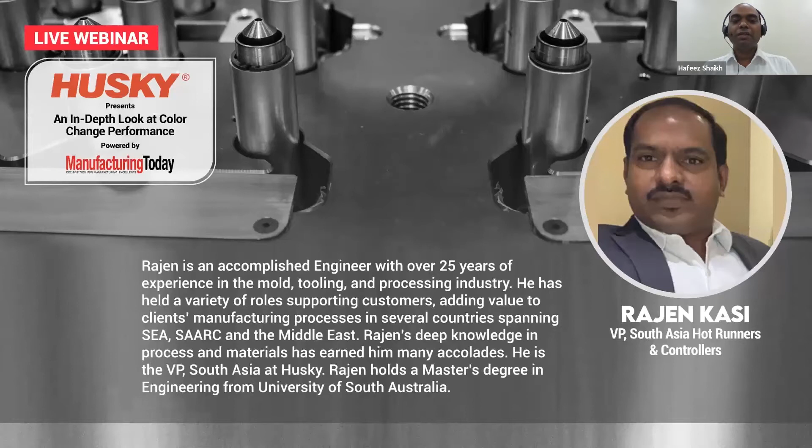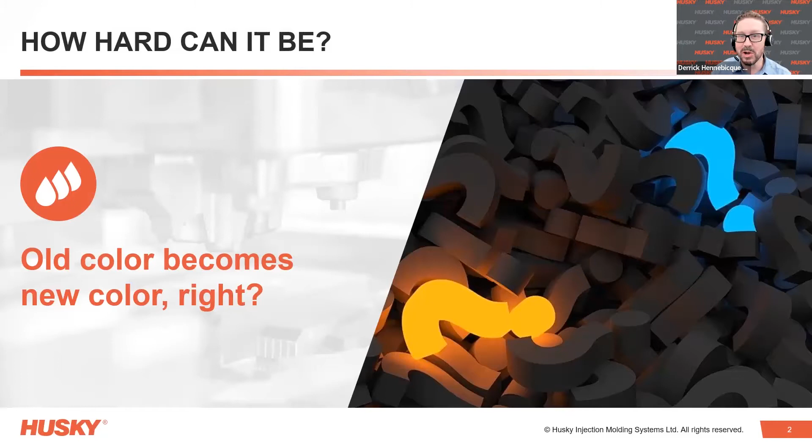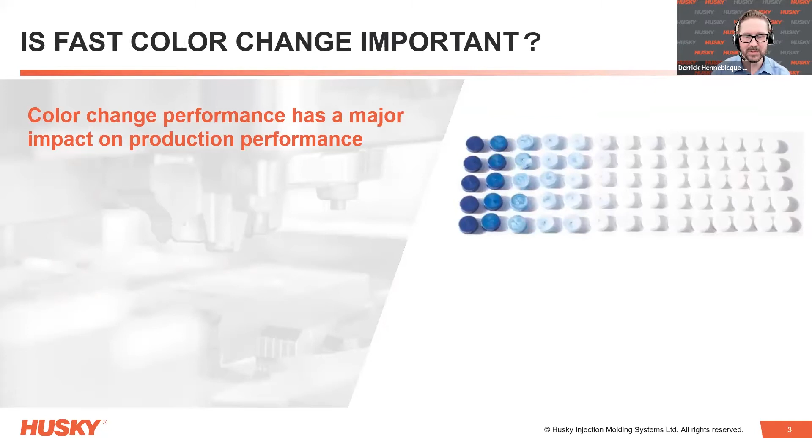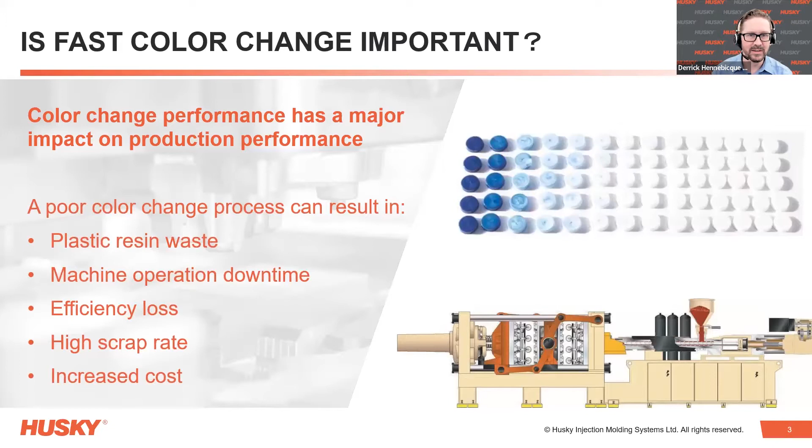From the outside, color change may seem simple and have little relevance to production or manufacturing. We just replace the old color with the new color and keep making product. How hard can it be? Of course, it's not that simple. Material must be cycled through the melt delivery system, replacing material of one color with material of another color. While it would be great to replace the color in a single shot, this is highly unlikely. Downtime and scrapped material are a fact of life when it comes to changing color, and it is a necessity for meeting the quality requirements of a specific customer or brand. A poor color change process can result in extra waste material, a high amount of downtime, and increased scrap. These can accumulate to higher production costs.

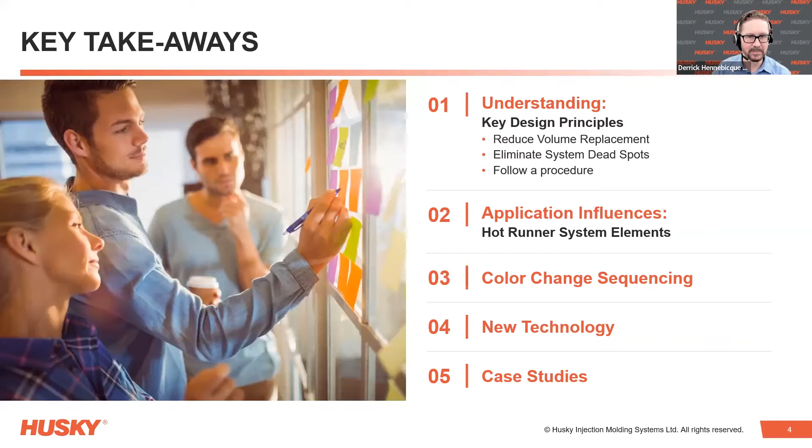Today, we'd like you to take away 5 things. First, the design principles behind hot runners and color change. Second, how those principles relate to hot runner design elements. Third, the benefits of color change sequencing. Fourth, we will discuss new technologies outside the hot runner and how they apply. And finally, we will talk about a couple of case studies. The first principle of hot runner color change is about minimizing volume.

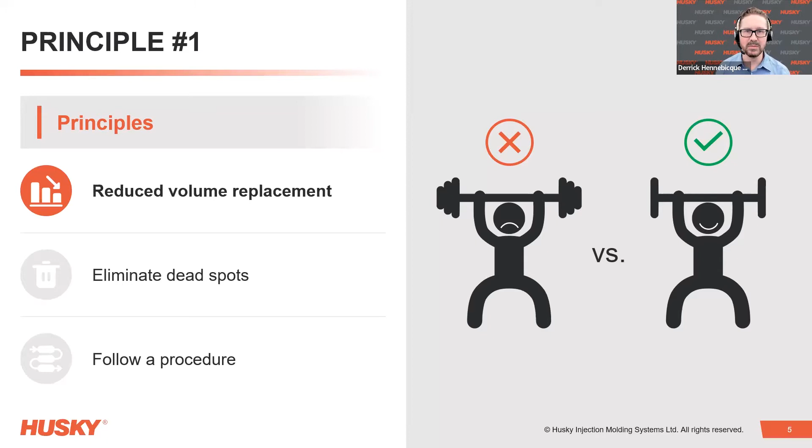Like the cartoon shown here, small things are easier to move than big things. When it comes to hot runner color change, the thing to move is the previous color's volume of molten plastic inside the melt channels. If this volume is small, it is much easier to displace than a larger volume.

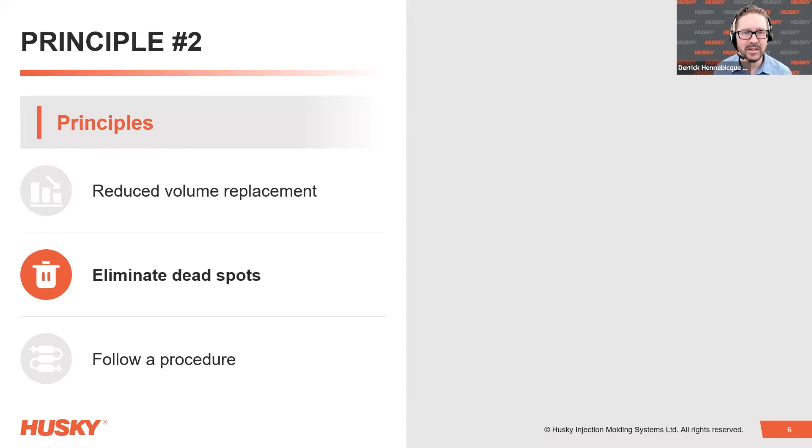The next principle is eliminating or minimizing dead spots, also known as no-flow areas or stagnation areas. A visual way to consider this is with the surface of a road. If the road is smooth, rain quickly and easily runs off the surface. But if the road is rough and full of bumps and holes, rain can pool and collect, causing slow and long-term damages and deterioration. The hot runner is the road the melt follows from the machine barrel to the cavity.

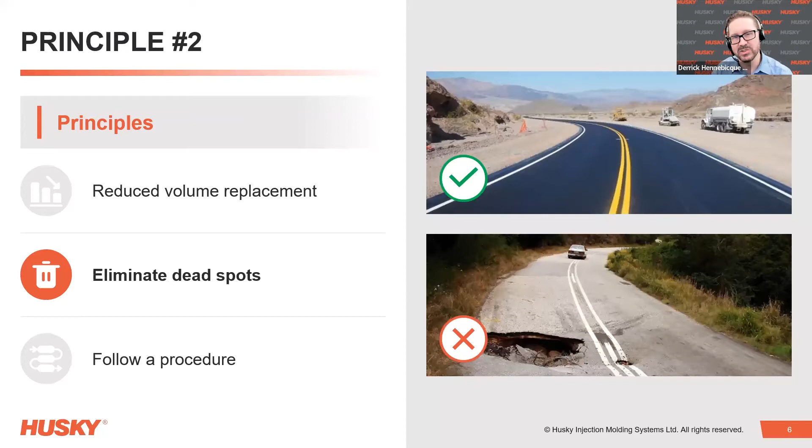The bumps and potholes in the road represent these no-flow or stagnation areas in the melt path. Old color may snag or hide in these no-flow areas where it can eventually stagnate and degrade. Old color in these areas may unexpectedly burp or bleed into the melt stream during production of the new and different color, causing scrap. It may require an increased effort or process changes to scoop out that old color, extending downtime for the changeover. So this isn't just about melt channel quality, it's also about managing the flow of that melt.

So the final principle is to follow a procedure and set expectations. It's important to understand these expectations, and it's known that many variables affect color change, which can affect the ability to meet that expectation. Process settings can help color change tremendously, so it's important to know if they can be changed. Designing a specific color change schedule and procedure can directly manage the ability to meet those expectations.

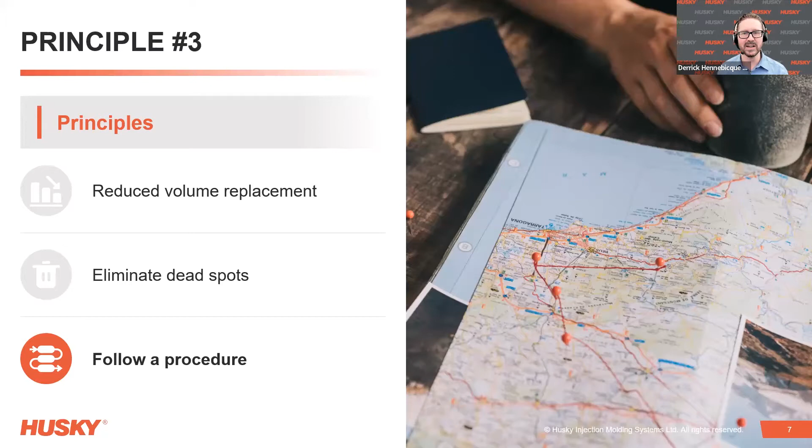For example, we wouldn't expect a 5-minute color change when dumping a bucket of white material into the hopper that's half full of blue pellets, unless we've seen it happen before with that same exact work cell and those conditions.

Now we will talk about how these principles apply and how they influence hot runner applications and designs. Our first influence is the control of gate bubble volume. This is affected primarily by the nozzle size and the gating style. The gate bubble is the volume of plastic surrounding the nozzle tip between the nozzle tip's seal ring and the gate orifice.

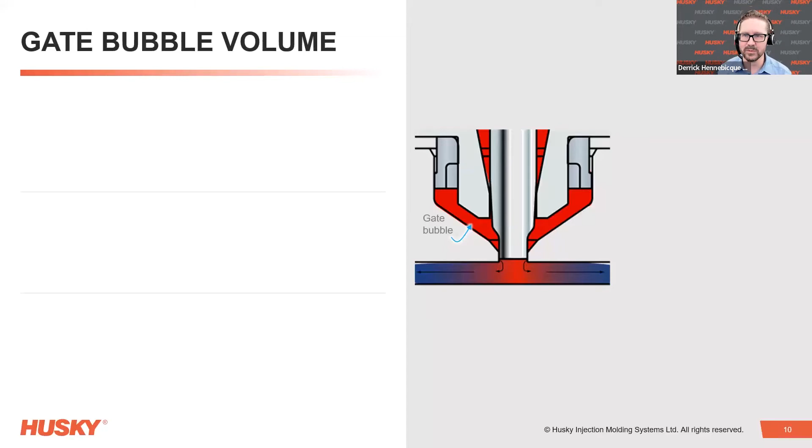While processing, this area is neither completely solid or completely molten. The resin contacting the gate steel is cool and solid, which acts as an insulator, but the resin closer to the heated nozzle tip is hotter and molten, giving the flow path from the nozzle to the cavity. The exact properties of this bubble and its cross-section are heavily dependent on the application and the resin.

The design of the bubble may have a stagnant or backflow area. This aligns with our bumpy road principle, where color in no flow areas can be difficult to replace and can extend color change time. The gate bubble and its effect on color change can be managed with a tip insulator.

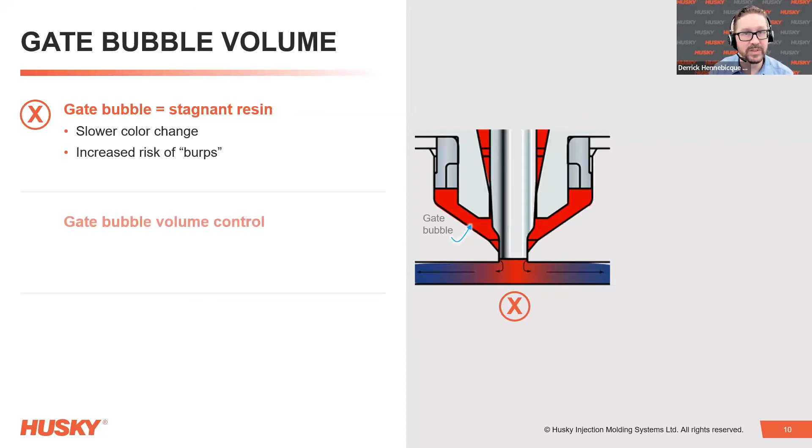This part is made from a relatively soft material that can withstand a relatively high temperature. This applies our reduced volume principle as it replaces and reduces the molten volume in the gate bubble. It also eliminates the stagnant or the backflow area.

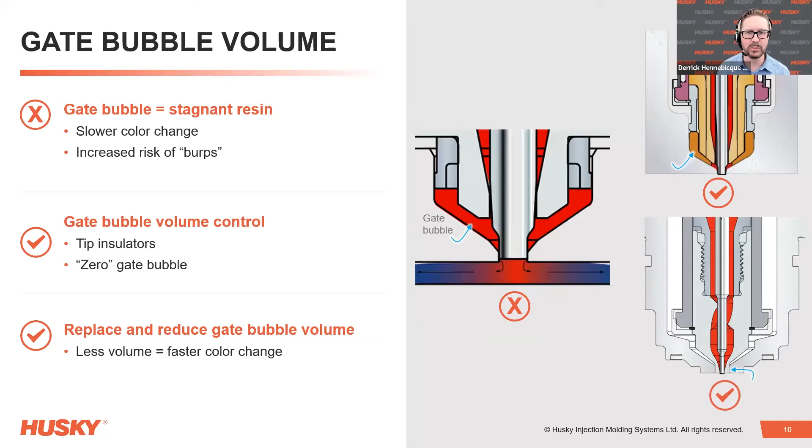A gate bubble is nearly unavoidable, but certain nozzle tip designs discard or zero out the gate bubble by sealing at the cavity interface. This also follows our reduced volume principle by eliminating the gate bubble altogether. With this gating style, no tip insulator is needed because melt flows directly from the nozzle into the cavity.

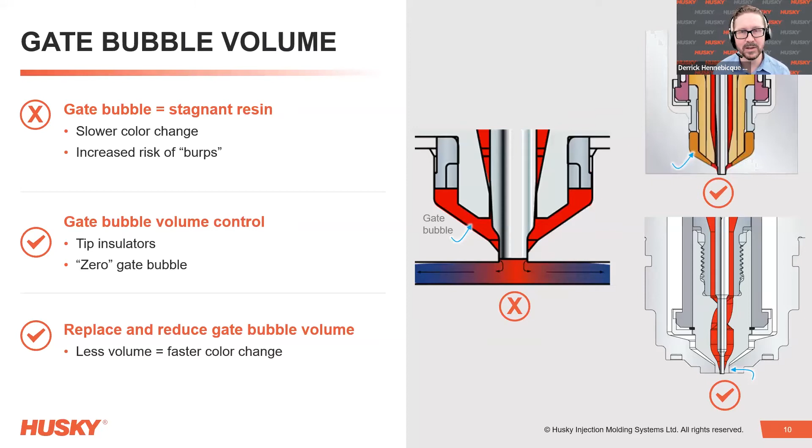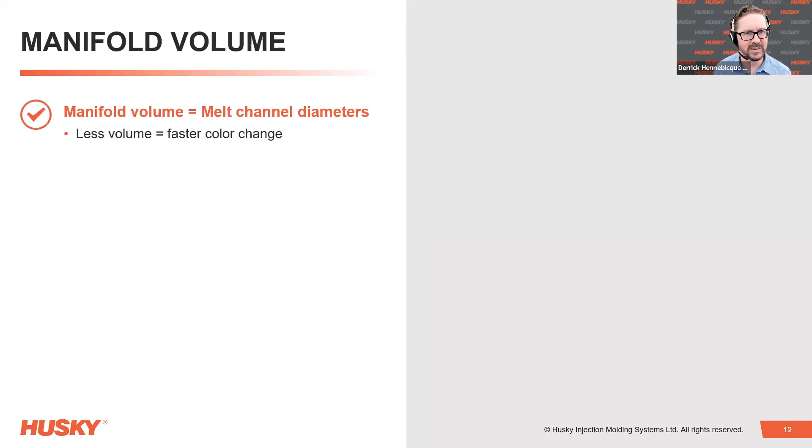Our next influence is manifold design. This applies to any hot runner, regardless of nozzle or gating style. When considering color change and the manifold's design, the key principle is volume control, and the greatest design influence on volume is melt channel diameter.

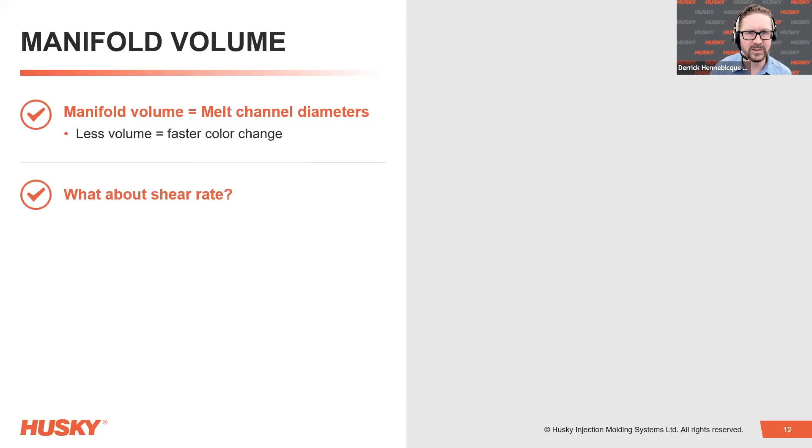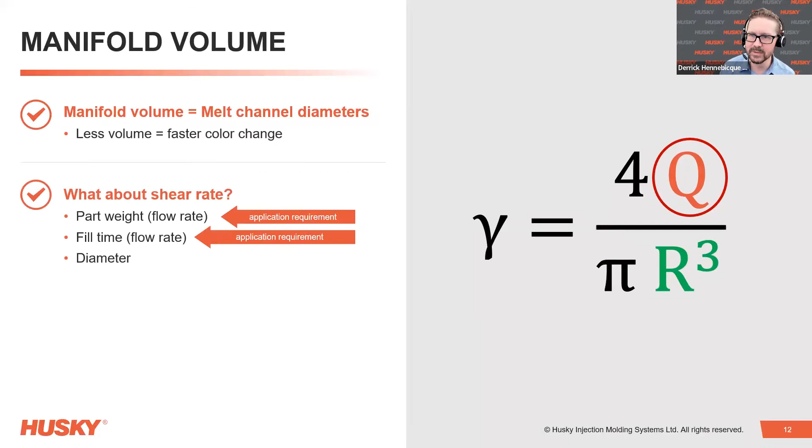Shear rate is sometimes quoted to have the greatest influence on color change, but it's important to remember where shear rate comes from. Its first two influences are part weight and fill time. These are application requirements. Part design dictates weight, while part geometry and resin properties dictate fill time. These are not controlled by the hot runner. But shear rate is also dependent on melt channel diameter, which is directly controlled by hot runner design.

While tip insulators or tip choice can be used to minimize volume at the gate, melt channel diameter in the manifold has a very strong influence when designing for color change applications. Since shear rate is not a true unit of measurement, we can view it as an effective rating for the color change performance in that channel or component.

Finally, a hot runner design must also consider the pressure requirement of the application. So while volume or melt channel diameter should be minimized, it should not be reduced so much that the pressure exceeds the injection pressure limit of the equipment. So having an excellent color change can't help anybody if the cavity cannot be fully filled and packed out.

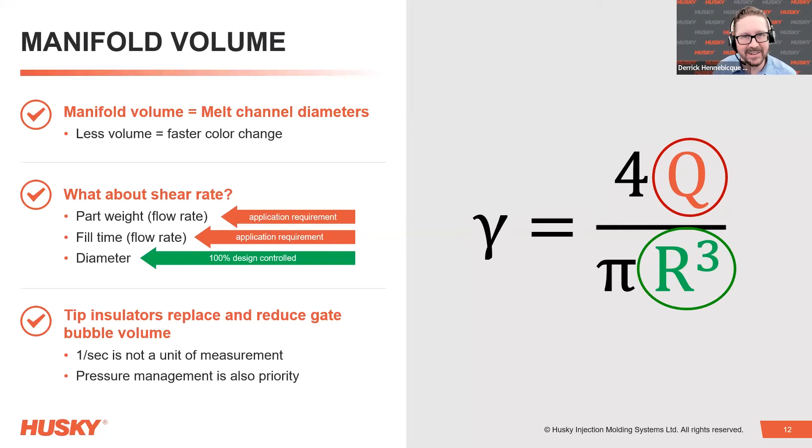Of course, the application or the part itself has an influence on performance. Part weight has an especially strong influence on color change. This is because as part weight decreases, shot volume increases, and as shot volume increases, color change speed decreases.

This is because there are two volume attributes for a hot runner: shot volume and melt volume. Melt volume is specific to the hot runner and is measured in units like cubic centimeters or cubic inches. It is the result of melt channel diameter and mold layout. This is purely geometric and stays the same no matter which press, which part, which mold, or which resin.

Shot volume is application dependent. This is determined by part weight and mold cavitation, which combine to make the shot weight. It is also directly related to the hot runner's melt volume.

For example, let's consider two different molds using the same hot runner. The mold making larger parts has less shot volume, even though the melt volume remains the same for each mold. This is because it's the same hot runner, and the greater shot weight consumes a greater portion of that melt volume. It's important to remember that just like a mold, a hot runner is limited by the laws of physics, thermodynamics, and finance.

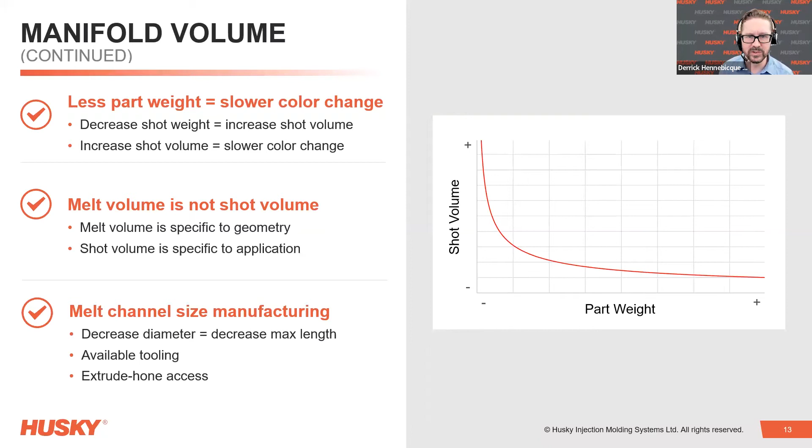The tooling for a small diameter melt channel typically has more limitations than a larger melt channel. This is due to availability of feasible and affordable tooling, which can truly be built and meet the application requirements. This can also limit the access of extrude hone material used to deburr and polish the melt channels. In other words, every design is limited by its ability to be manufactured. It's useless if it cannot actually be built.

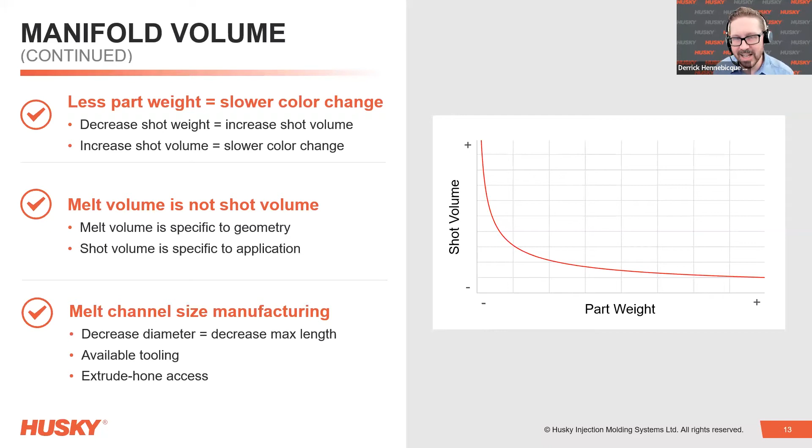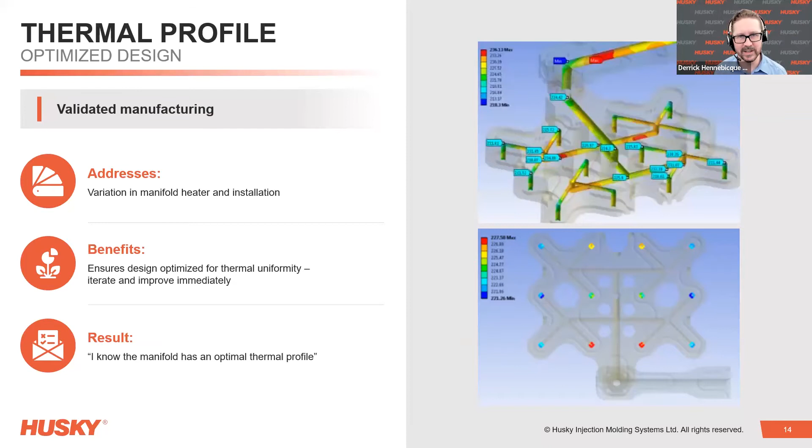Another factor to consider when designing hot runners for color change is the manifold's thermal profile. The thermal profile is optimized by adjusting manifold shape, heater wrap, thermocouple placement, melt channel layout, and load-bearing components. Their combined effect is confirmed and validated by finite element analysis, which ensures minimal thermal variation.

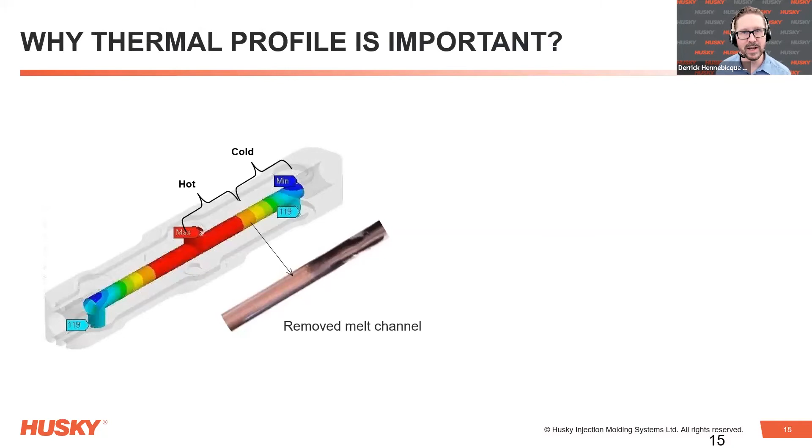In addition to injection pressure, a uniform thermal profile will minimize cold regions along the melt's flow path. In these cold regions, the thickness of the plastic boundary layer at the melt channel wall can increase. This increased thickness can act as a relative dead spot or stagnation area to cause difficulty when changing color.

So to minimize risk, Husky confirms every manifold design's thermal profile.

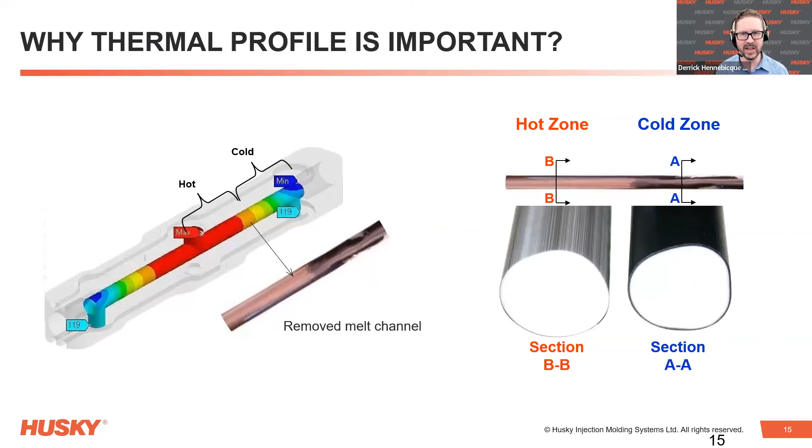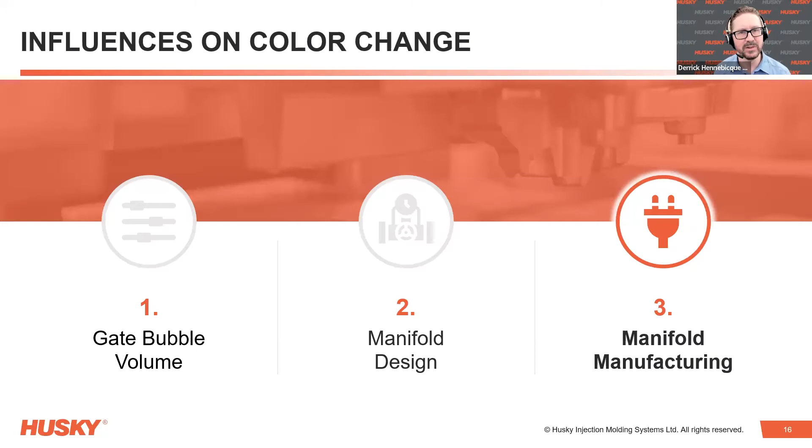While our first two influences on hot runner color change covered application and design, how the melt delivery system is built also has an influence on color change performance. Specifically, this is about minimizing variation.

One way to minimize variation is by automating the heater install. This ensures consistent performance from each heater and each zone. This can be important for high cavitation molds where multiple manifolds with the same design are used. This also ensures consistent expectations if the hot runners are swapped in a fleet of molds, or taking comfort in knowing the hot runner performance will be the same before and after a preventative maintenance.

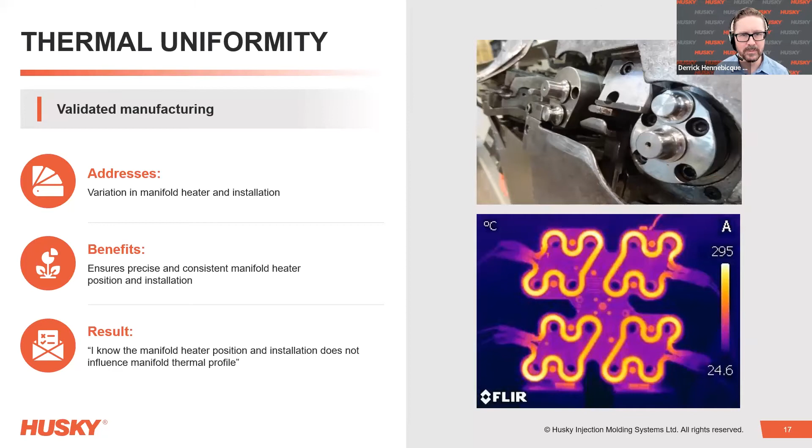In addition to resistance checks and power testing at final assembly, another option is to validate manifold heaters by using thermal imaging. This is periodically used for audits and troubleshooting.

Manufacturing has its greatest effect on the second principle, which is minimizing the dead spots or ensuring a smooth melt flow path. When resin is not flowing, it's stagnant. Not only are these stagnant areas hard to displace, but stagnant resin can degrade over time. If a colorant is sensitive to heat, this can present a challenge to production quality.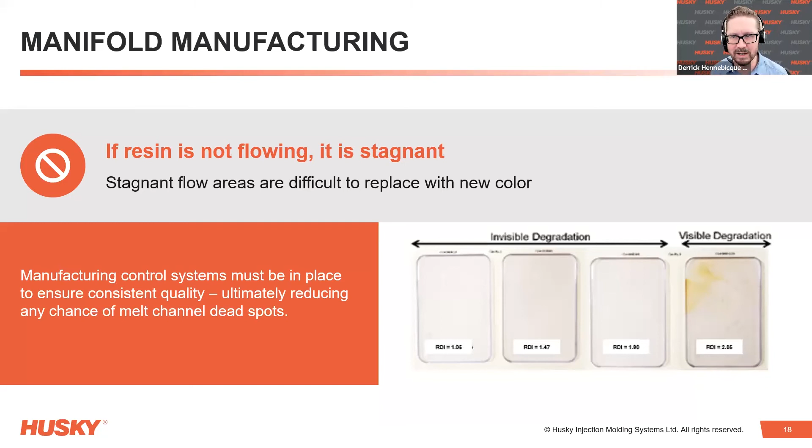One of the ways we validate this is by measuring and comparing the degradation of sample parts from manifolds with various build conditions.

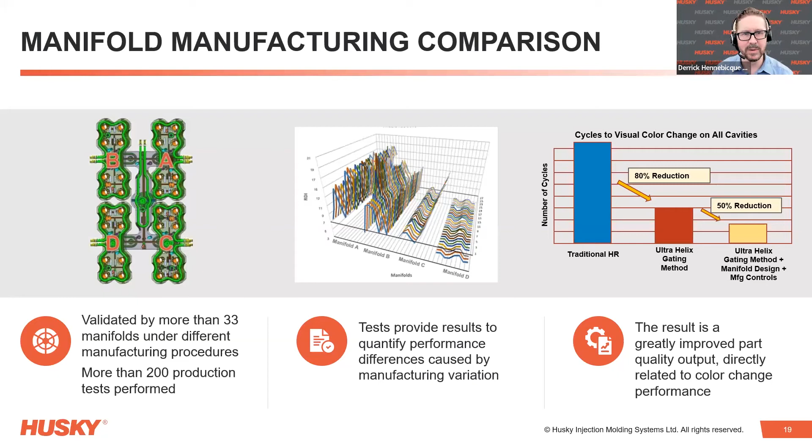We tested these manufacturing influences by building several manifolds with different levels of variation, running color change procedures, and comparing their performance. The results showed that by applying our principles, gating, and minimizing manufacturing variation, we achieved the best color change possible. Among our principles, the third and final is to set expectations and create a procedure.

This is one of the most effective ways to execute color change. It is immediately controlled by the production schedule, the operator, and the equipment on the production floor. The order of colors changed has a substantial impact on resin usage and downtime.

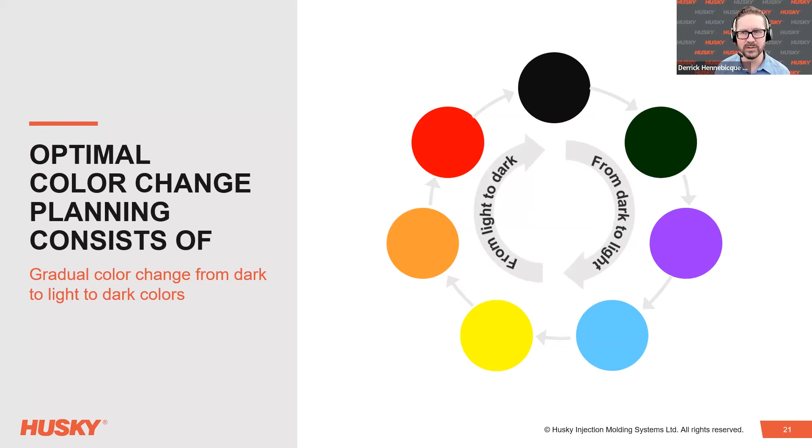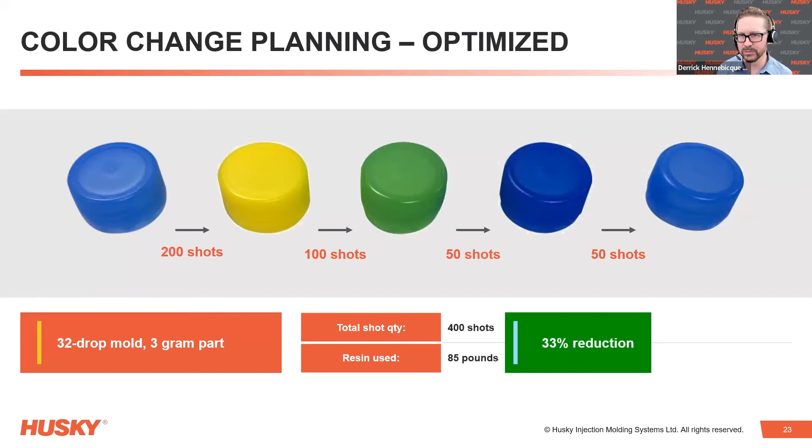But by just changing the run order of these colors to minimize the change time between colors, the changeover was reduced from 600 shots to 400 shots. Wasted material was reduced from 127 pounds to 85 pounds. This was a savings of 33% in both downtime and scrap material.

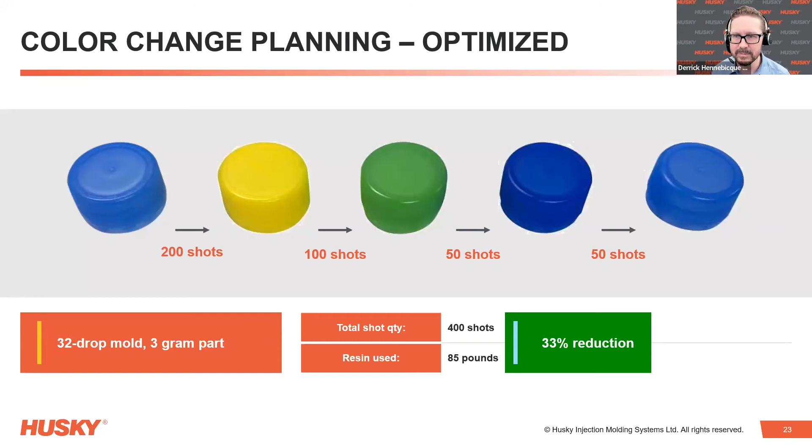By taking this consideration in the production scheduling, this takes advantage of a best practice and is a great example of applying the procedure principle.

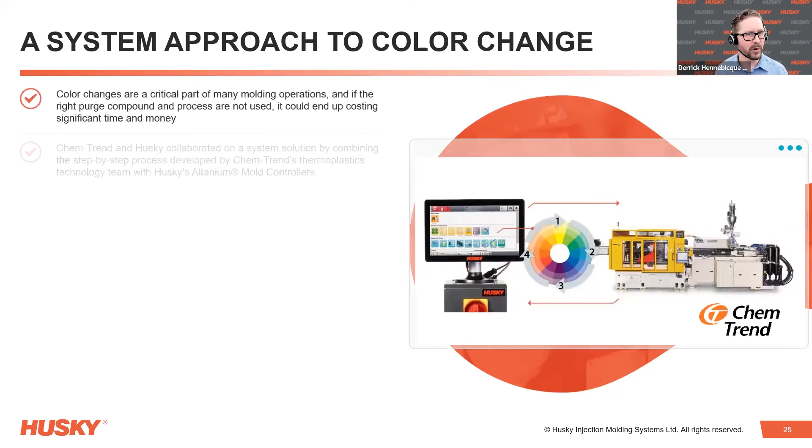On top of hot runner design considerations and scheduling, other technologies can be leveraged to decrease color change time. So far, we've shown changing color does not hinge on a single set point or a single asset. By taking a system-based approach to include the molding machine and the hot runner temperature controller, consistency and efficiency can be improved further by utilizing purging compounds, which are best discussed with an appropriate supplier for your application.

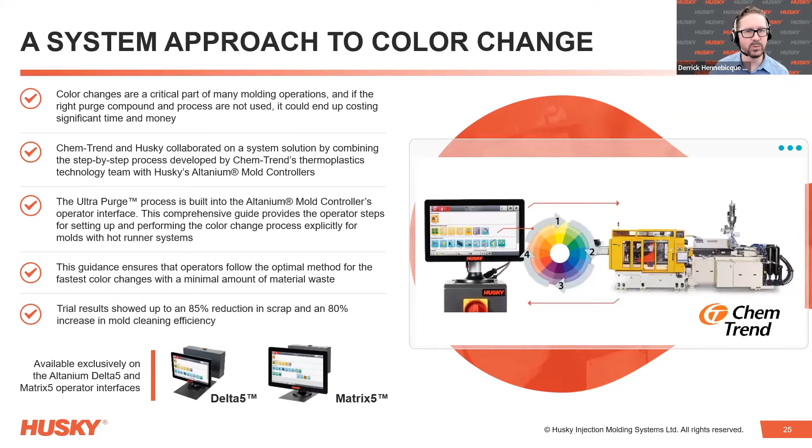Husky worked with one supplier on a system solution to include processes in the temperature controller's operator interface. This gives work instructions that are consistent and immediately available. By having instructions in a centralized location and automating certain steps, this can also reduce scrap and downtime.

Using Husky's ALTANIUM controller and its touchscreen monitor, color change instructions can be integrated into the ALTANIUM software and give precise guidance at the operator's fingertips.

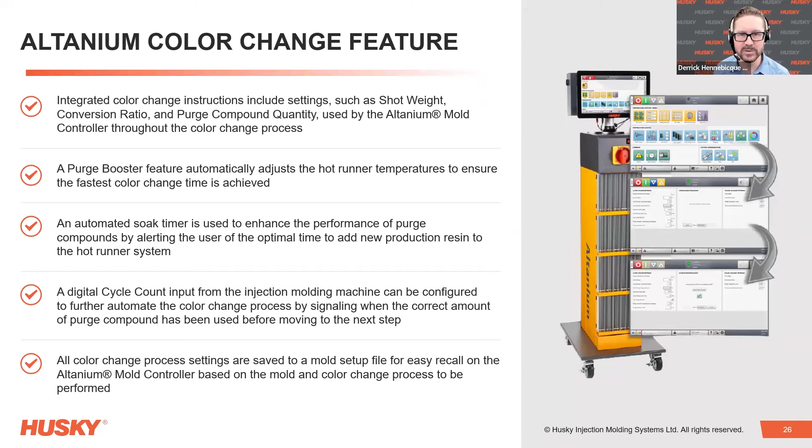Features such as soak timing and automatic temperature adjustment, coupled with cycle count input from the molding machine, can ensure correct steps are followed every time with automated procedures. This delivers consistent and optimized results, no matter the machine or the experience level of the operator.

So now, let's take all those principles and concepts and see their impact on some real-world examples or case studies. In one study, we saw a 32-drop polypropylene closure mold where changing from amber color to natural was reported to need up to 9,000 cycles in 28 hours until an approved part of acceptable color was produced.

This may sound outrageous, but we need to remember that for many large brand owners and OEMs, color represents a specific part of their product brand and is a product differentiator. So what I'm trying to say is that companies can be very picky about color.

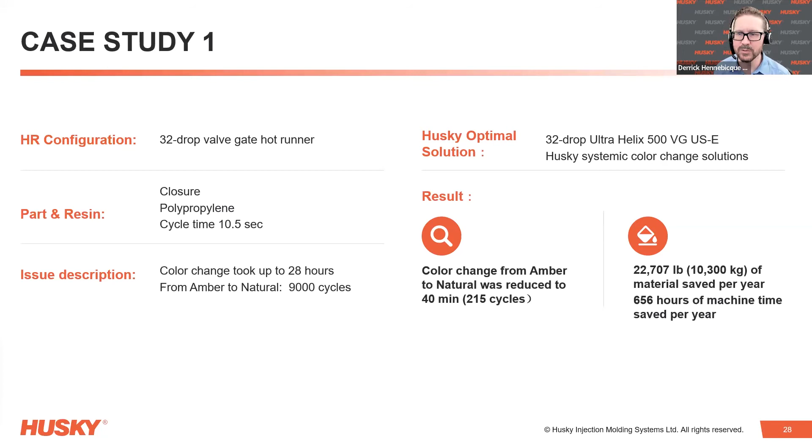Considering this, we implemented adjustments and solutions which reduced that changeover to 215 cycles in 40 minutes. Not only did this save over 22,000 pounds of scrap material, but it saved more than 650 hours of machine time. That's almost the entire month of February.

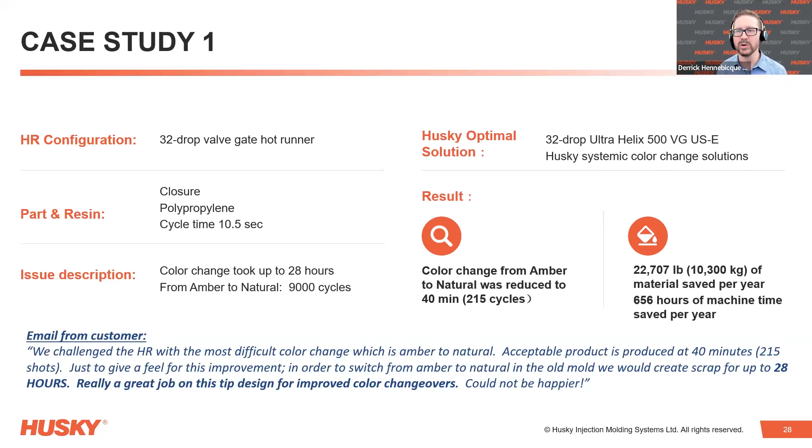This not only represents significant cost to the molder, but was also a significant point of frustration, which can happen regularly in our industry. In another case, we reviewed a 2-shot mold with 8 cavities.

This used 2 different grades of polypropylene. This mold also had a high color change frequency. Its most demanding change was from black to white, which is always one of the most challenging. It required 1,100 cycles to make this change.

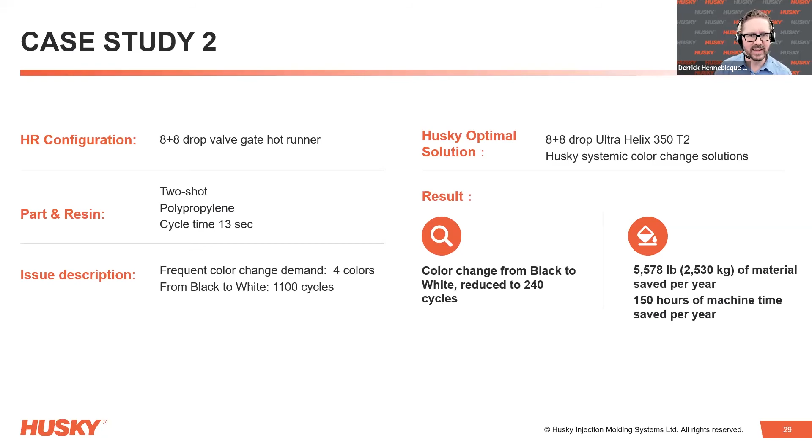With review and solution, this was reduced to nearly a quarter of the original time at 240 cycles. This saved over 5,000 pounds of material and 150 hours of operating time per year. So from these case studies, we can see the value of a high performance color change.

So we hope today that you've learned and gained an appreciation not only for the importance of color change, but for all the considerations needed to make it happen, such as design principles, application influences, and the importance of color sequencing. Thank you for your time.

I'll be happy to take any questions, either now or if you feel like reaching out in the future.

Back to you, Hafiz. Derrick, thank you very much. I would personally, it means a lot. You are in Canada and it's 5 a.m. over there.